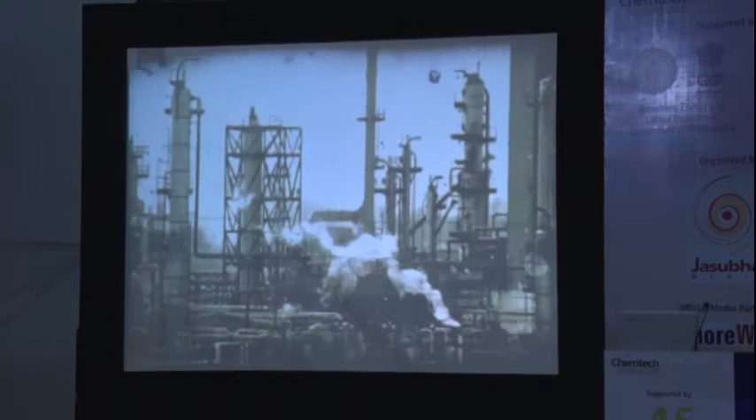Fresh air is vital for life on our planet to evolve and flourish. The air we breathe is our most valuable natural resource. But there is something in the environment creating an unhealthy world to live in. The presence of sulfur and carbon dioxide is creating hazards, making the air around us harmful. Someone, somewhere, somehow was about to become a catalyst to contribute to improving processing methods and contribute to humanity as a larger cause, to bring a change that would create a better, healthier environment around us.

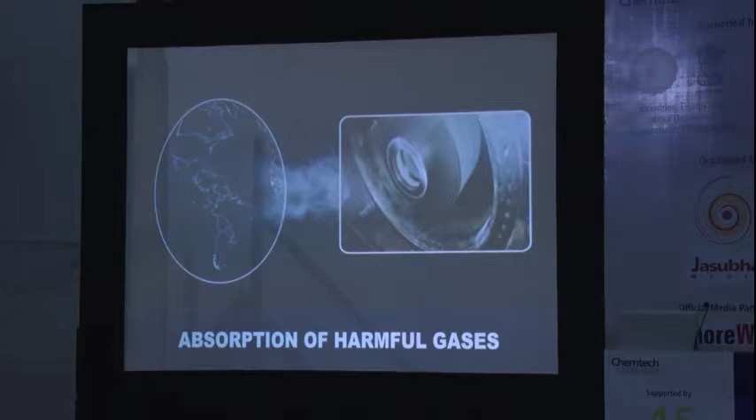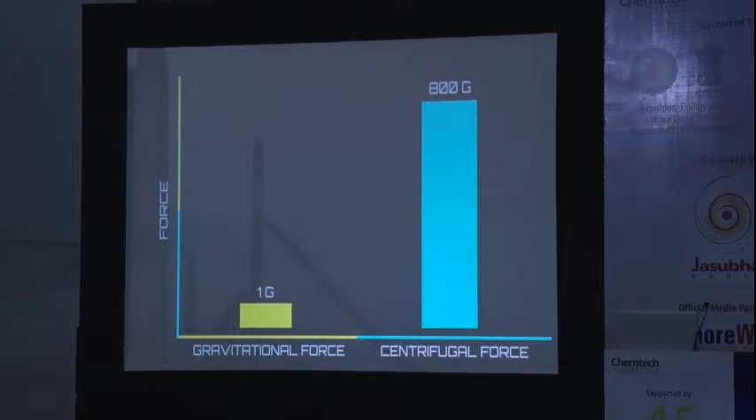Treelock Corporation, an innovative company, after rigorous research and development, has developed a unit using high-G technology for absorption of various harmful gases which pollute the environment. The high-G technology is based on utilizing centrifugal force instead of gravitational force. This centrifugal force develops a force which is 200 to 800 times more than the gravitational force, and is used for enhanced mass transfer between liquid and gas. This concept of high-G is used to replace conventional columns for distillation, deaeration, biogas upgradation, absorption, and desorption.

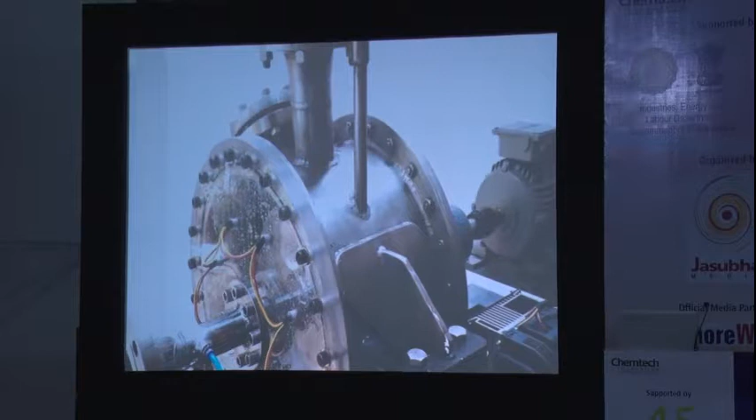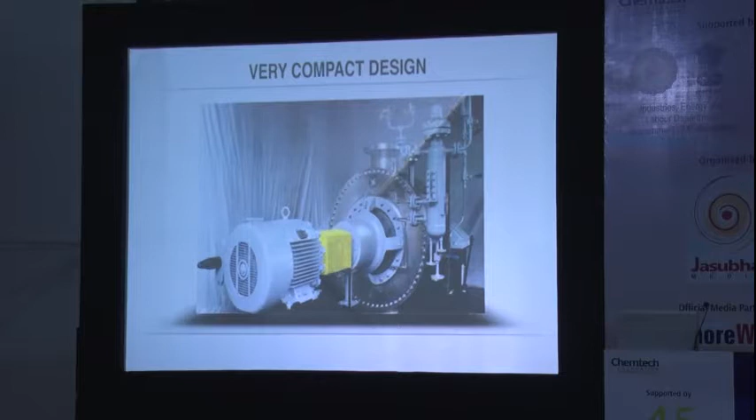The rotating packed bed, RPB, concept for mass transfer was initiated many years ago and later developed with various innovations. Treelock Corporation, along with process intensification consultants, developed a unique design of rotary packed bed to achieve high efficiency. The mechanical design is developed by Treelock, a very compact design using the best quality material suitable for this application. Every stage of the manufacturing process has been certified by a third-party inspection agency.

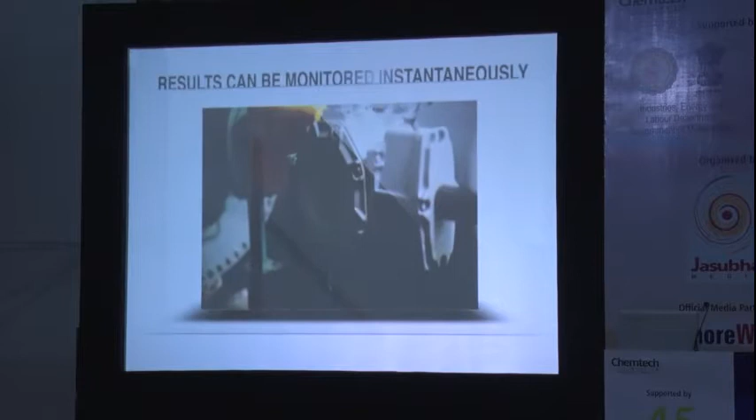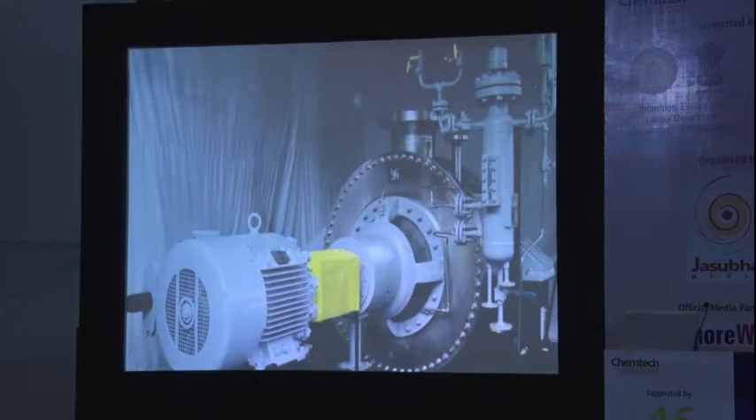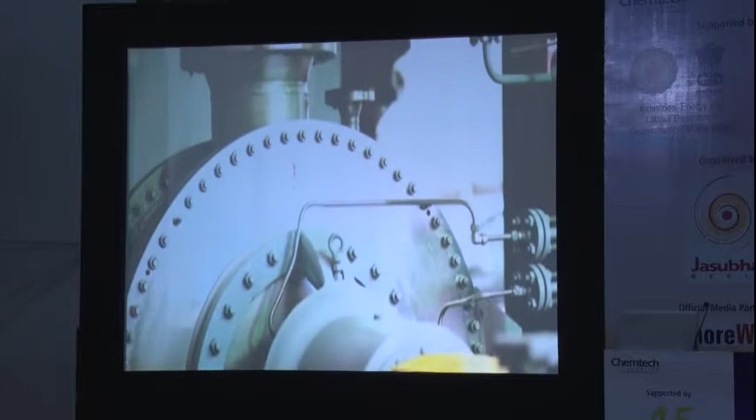Variables can be managed effectively. Results can be monitored instantaneously. Easy to maintain and relocate. Compatible for different process applications. There is a desire and vision to design and make units like these for various processes, like a complete sulfur and carbon dioxide recovery unit on skids, which can be easily installed at any location in the shortest possible time, and which will give instant eco-friendly products and byproducts in the global process industry.

High-G process: the solvent enters the high-G absorber unit through the nozzle located at the center of the rotating packed bed, which has a very high surface area. Due to the centrifugal force, the solvent travels away from the center to the periphery, passing through the rotating packed bed.

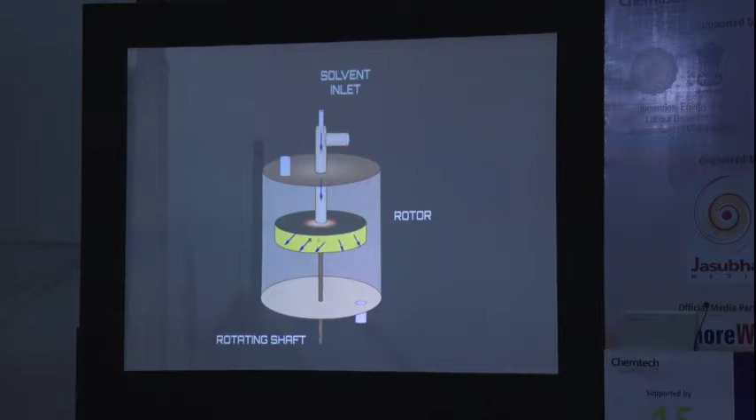Simultaneously, the impure gas is introduced from the periphery of the RPB, which travels towards the center due to differential pressure across the bed. Such interaction of gas and solvent enables the solvent to absorb impurities like carbon dioxide or hydrogen sulfide from the gas.

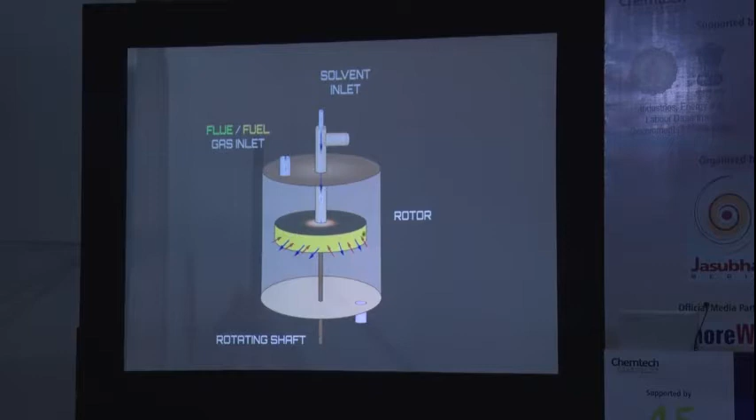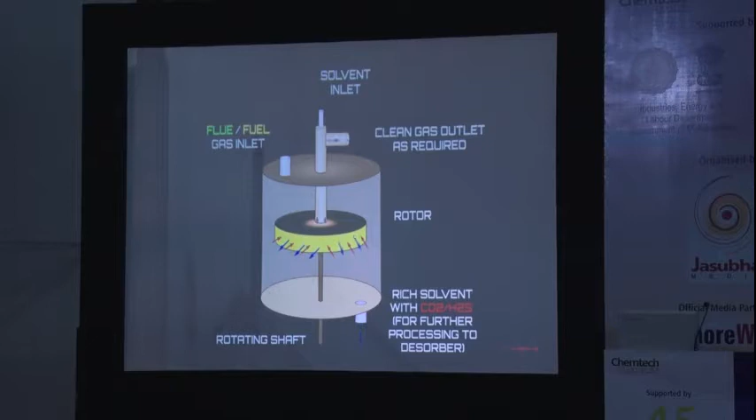The clean gas is released from the center of the high-G, and rich solvent exits from the bottom of the shell and is sent for regeneration to another high-G desorber unit. In the regeneration process, the rich solvent is heated and passed through the second high-G unit. Due to centrifugal force and high surface area of the rotating packed bed, solvent moves away from the center.

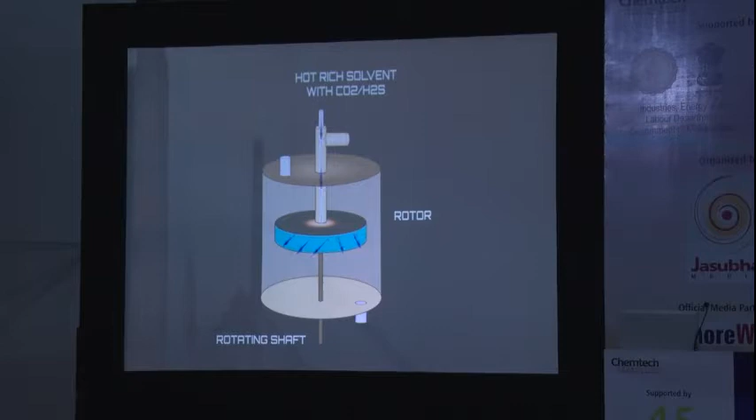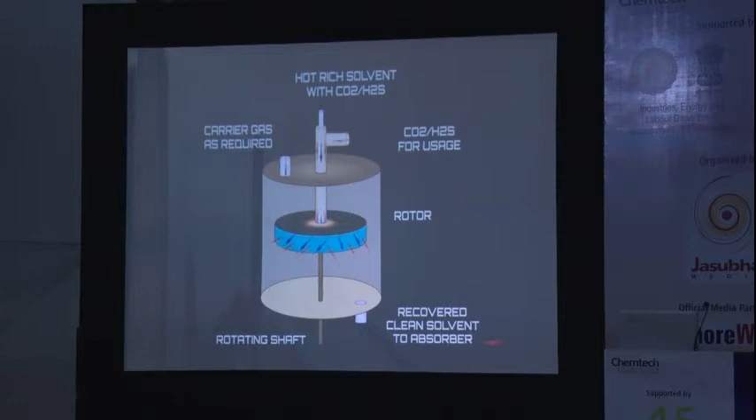While passing through the rotating packed bed, solvent releases the polluting gases, which are pushed back towards the center by a carrier gas, which is inert and will not be absorbed by the solvent. The polluting gases like carbon dioxide or hydrogen sulfide are then released through the outlet nozzle of the unit, and lean solvent exits from the bottom of the shell for absorption in the first high-G unit.

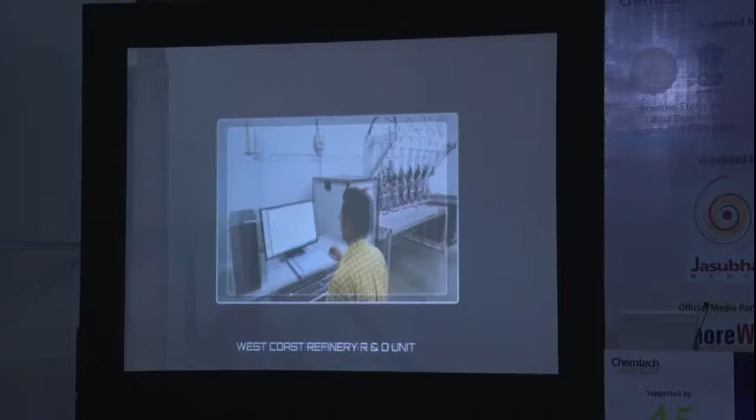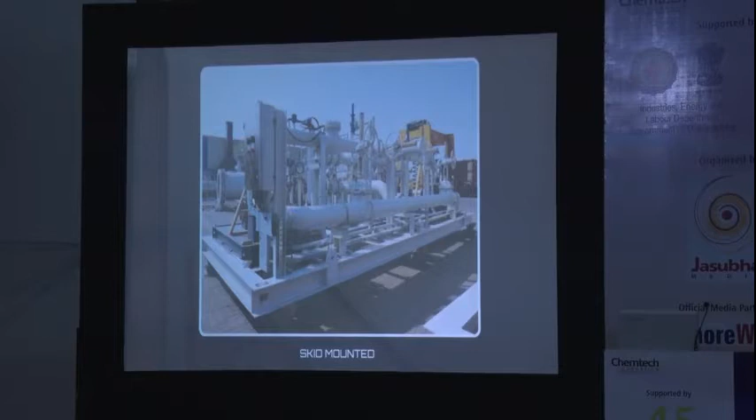High-G units were supplied to a refinery in East Coast. West Coast refinery R&D unit. CO2 Solutions, Canada. Advantages: can be skid mounted and located either at source or user end, fully automated with HMI or SCADA. Compact size and can replace conventional tall column systems.

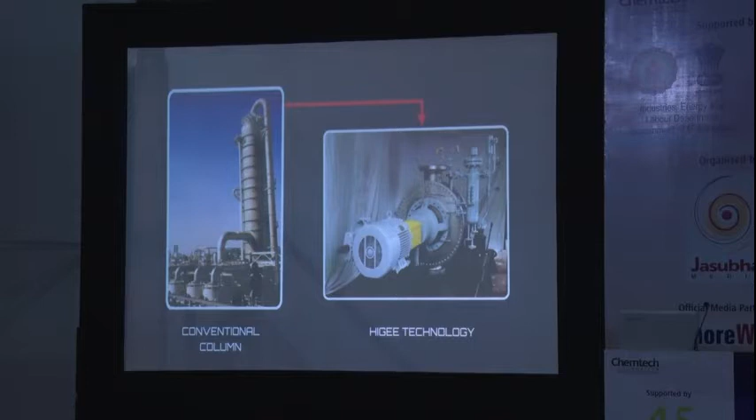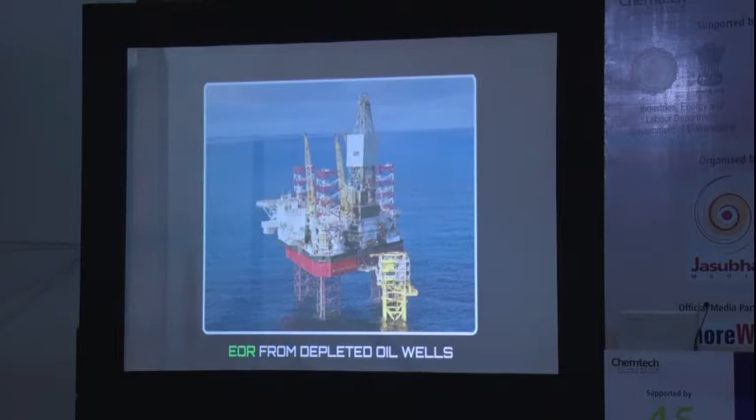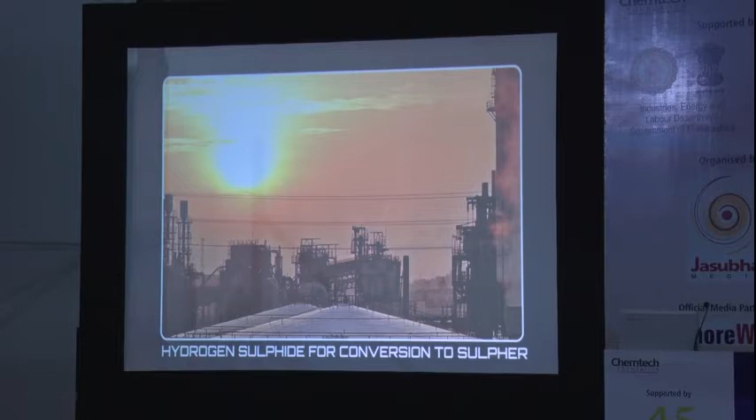Applications: carbon dioxide for dry ice, carbonated drinks, enhanced oil recovery from depleted oil wells, breweries, calcium carbonate for cement plants, hydrogen sulfide for conversion to sulfur, biogas produced from waste, then upgraded by HiGee to CNG or power, that is a waste to energy cycle.

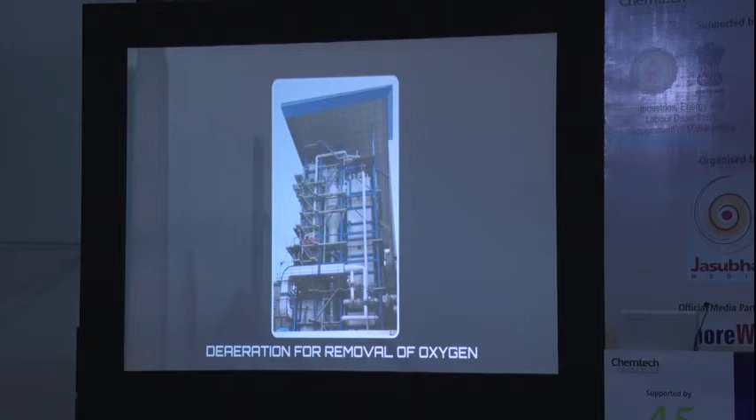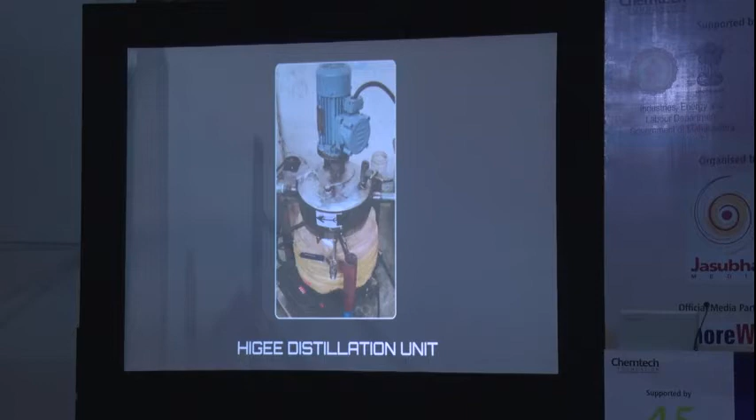We all can leave money and property to our children, which will be of no use unless we leave them a cleaner world, where they can enjoy the legacy left to them. It is a solemn responsibility to do so for posterity. HiGee in its humble way contributes to a greener world.

Thank you, gentlemen, for patiently hearing this. I trust most of you have got an idea of how this HiGee works. Basically, HiGee means high gravity. We create a very high gravity as against the one gravity, which is the conventional column method. We expect that to be there for the next couple of decades, and then I think we should all be HiGee.

The idea is not only to make it a cleaner world and reduce the pollution, but the basic use; CO2 today has a wide application. Earlier speakers have been talking about EOR, enhanced oil recovery, and yesterday, as I heard, it adds about 3% of the oil we use for producing the various distillates.

Well, in the case of carbon dioxide, it has got much more. The cement plant is one of the biggest polluters. The CO2 which is got from there can be converted into calcium carbonate, which can again be used as a raw material for producing cement. It's got multifarious uses. It can be completely used. So also with sulfur, conversion to sulfur. Of course, the requirement of sulfur may be more than what is produced.